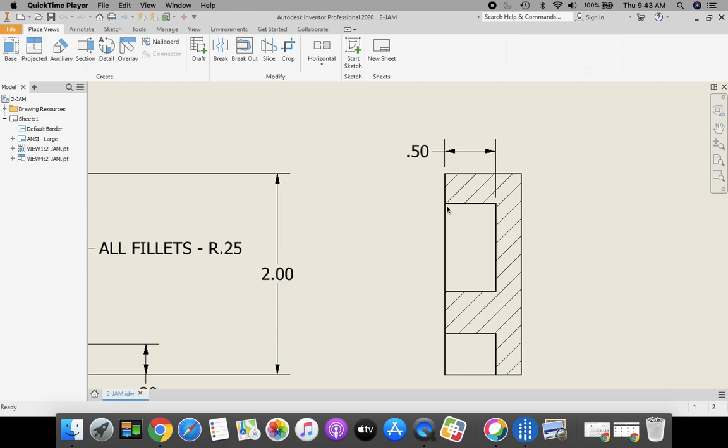It's never a good practice to dimension hidden lines. We could have done it up here on a hidden line, but it's not good practice. So that's why we're creating this section view, and here we're going to dimension to an object line to show the depth of these two pockets. Okay, so let's get started.

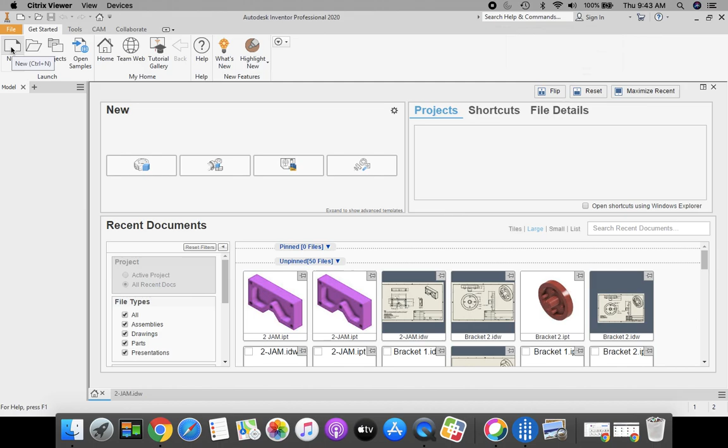Today we're going to start off on our home view, and we're going to come up to our ribbon bar in the top. We're going to select New, Standard IDW, this icon right here, and click Create.

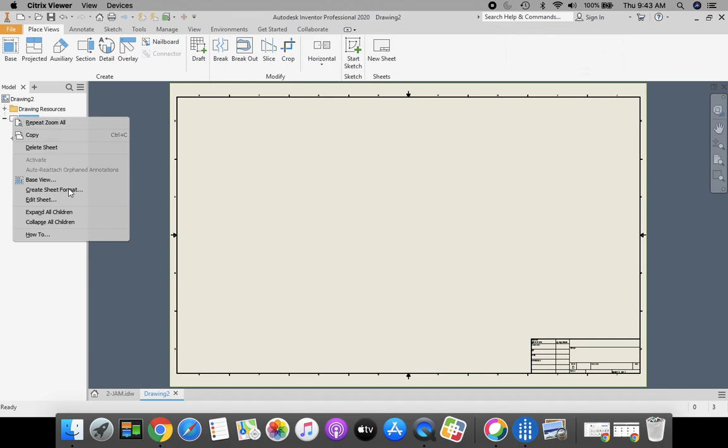Once again, we need to change our sheet size. It starts off with default as a D size sheet, so we're going to come to the model browser bar on the left hand side, and we're going to go to Sheet 1, right click, Edit Sheet. And here we're going to change our sheet size to size B and click OK. Okay, looking good so far.

Next, let's go get our 2 JAM part. We're going to come up to our ribbon bar. We're going to click our base view and select that. Then we need to go to our browse folder right here, the magnifying glass in the folder to open our file.

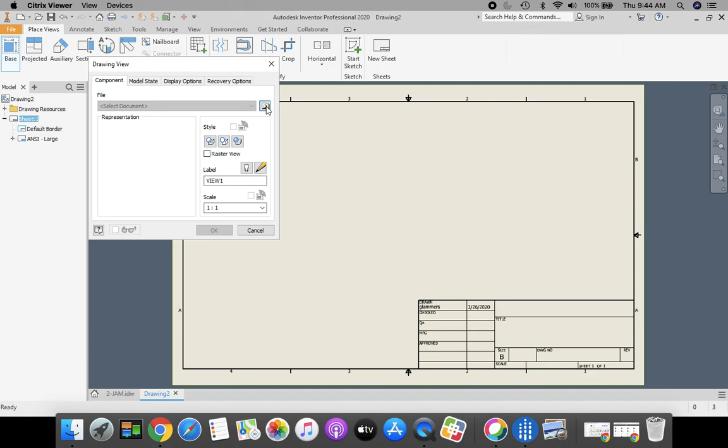We should automatically go to our H drive, this gray box, green line underneath of it, first initial last name 000. If that doesn't automatically come up for you, just click on the pull down menu, and all the way down to the bottom is where you're going to go. Okay, and in your H drive, you're going to find your 2 JAM part and click Open.

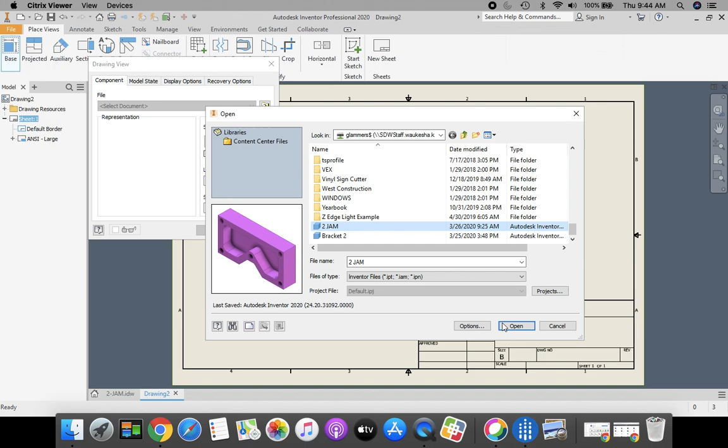Once we have that selected and identified, we're going to click OK. Take your cursor, get the red dotted line that goes around the perimeter of your object. We're going to click and stretch this over to the left.

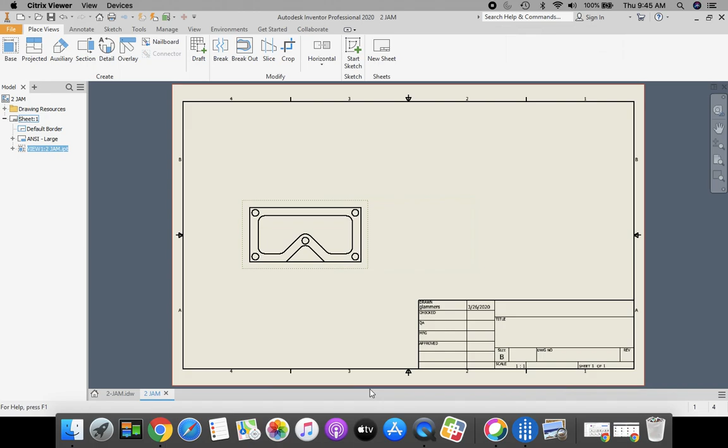Okay, now let's talk about creating that detail first. So up in the top here, we have a couple different views. We've used base and projected view before. Now we're going to come across and we're going to choose section view, and this shows the internal detail of a part. So we're going to click on section view.

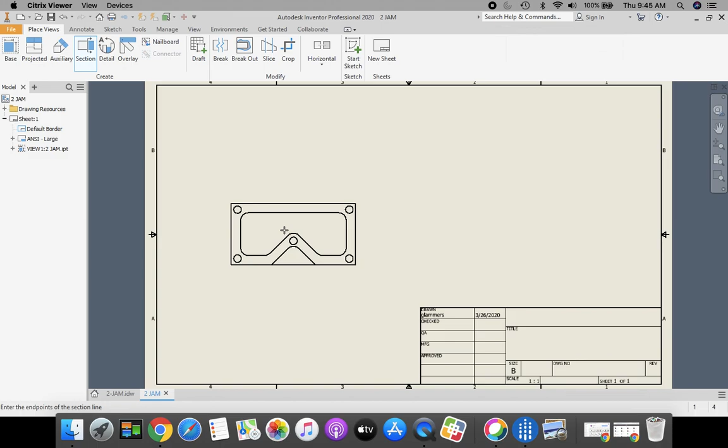And we're going to come over here, I'm going to zoom in on that a little bit for you. We're going to come in here, and I want to have my mouse kind of in a vertical line that I'm going to end up cutting through this direction right here. Okay, so I'm going to click, and I'm going to start making my line come down. This is where I'm cutting through, and that looks like a pretty good place to cut.

If I'm not happy with that, I can always press the Escape key, click Section again. Once I get that plus mark, I'm going to click, and I can draw that down. Try and stay on a vertical if you want. Okay, so here we go.

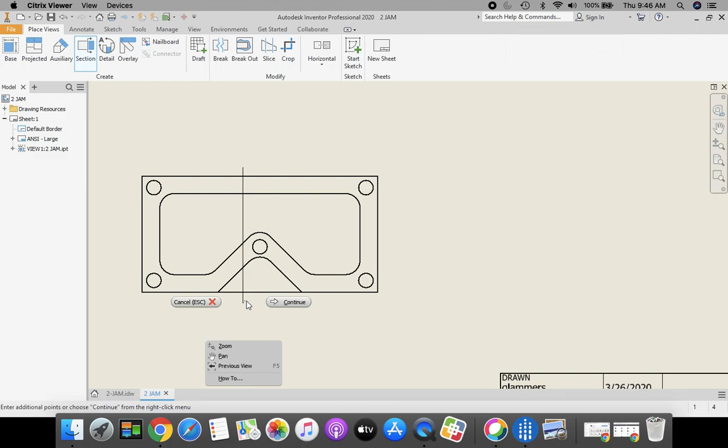Get your little icon changed to a plus by clicking, and then I'm going to stretch that coming down. Once you're happy with where you're at, we're going to click to place that line, and then I'm going to right click. Those of you on an iPad, you might have to go up to the top, use that little window shade pull down and select your mouse to get your right click, and then I'm going to select continue.

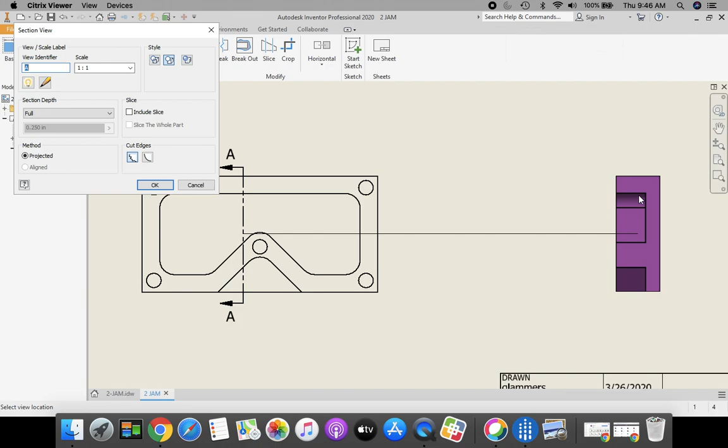Okay, automatically it takes and positions my section view line, so you can see my cutting plane line. Let me move that off to the side. You can see my cutting plane line here. I'm going to take my detail and I'm going to move it off here to the side. Click to place it. Nothing to it. That's how we make a section view.

Okay, let's go back out. Now let's take care of the other view. We need a top view up here, and we need a pictorial isometric. And in order to do that, we're going to click our projected.

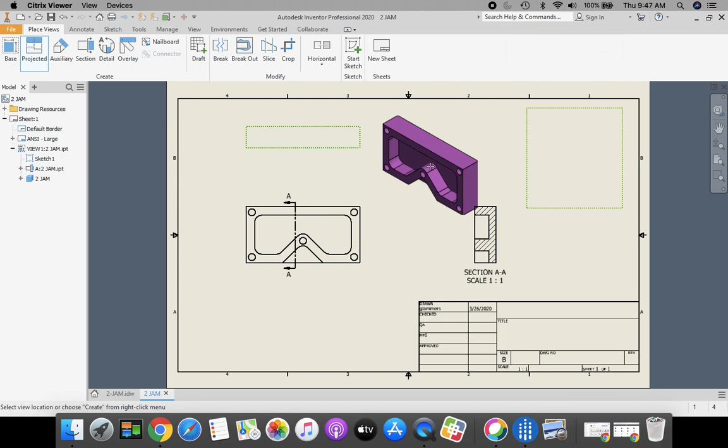Okay, now when I selected my projected view, it doesn't automatically have that icon or that image attached to it, so I need to come down to my front view, click my front view, and now I have that attached here. So I'm going to position my top view, click to place it, and I want my pictorial isometric view, click to place that as well. When I'm finished, I'm going to right click and select Create.

Okay, now according to the dimensions that are on here, these are dimensions you guys are going to be putting on. I'm going to place those on as well. These notes and the techniques learned, you don't have to add those on.

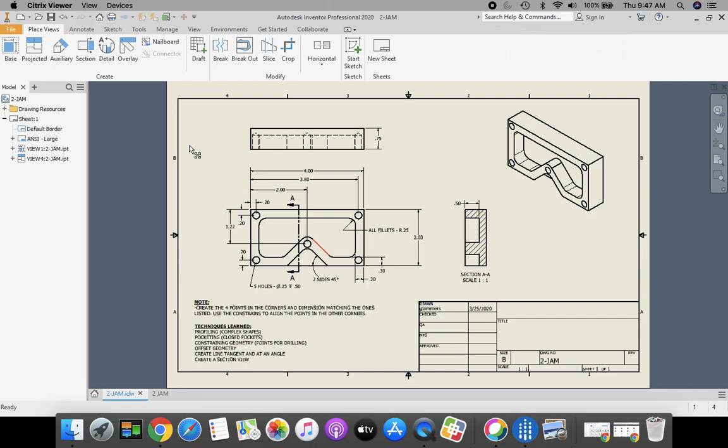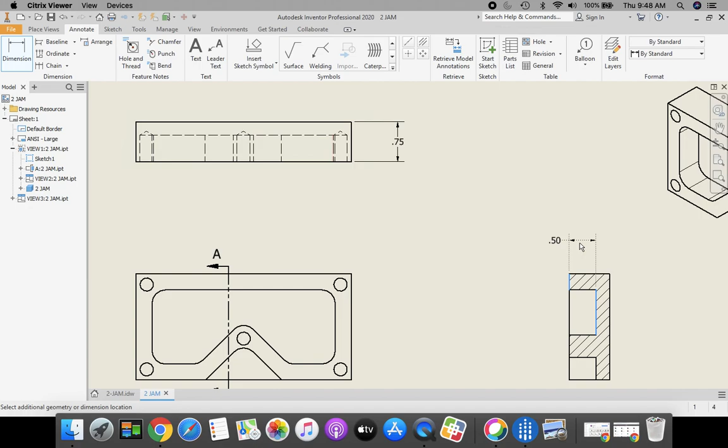Let's go back to our drawing. So now on our drawing, I'm going to go up to the top above my ribbon bar and select Annotate. Coming in on my top view, I need the Dimension tool, and I'm going to dimension the right side of this top view. That shows me my extrusion depth. And this is where our detailed version, our section view version, comes in, where I can actually dimension to get the depth of that pocket.

Okay, now I think all the other dimensions we have on our front view. So let's start placing some of those on. Dimension tool, I'm going to dimension from the hole to the side, hole to the top. And all I'm going to do is keep placing these on according to the same location that they are on our part. This shows us our offset.

What else do we have in there? Okay, nothing too bad. I need the vertical one for our hole. Okay, now let's take a look at our hole and thread tool. For dimensioning, since we have holes and threads, we're going to take and place this on here. Bring that down, that looks like a good spot. And let's see what else we're missing.

We could do this angle dimension in here. So let's go back to our dimension tool. Click on your angle line, click on your horizontal line. Okay, now you see how it puts the 45 degree on our block. That's just the order that we selected in. So let's do our bottom line first and then our angle line, and see how that takes our 45 degrees and puts it on the outside now. Okay, that's a much better spot.

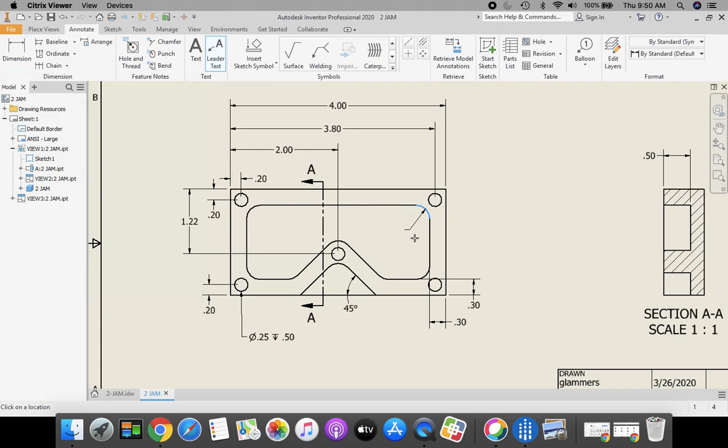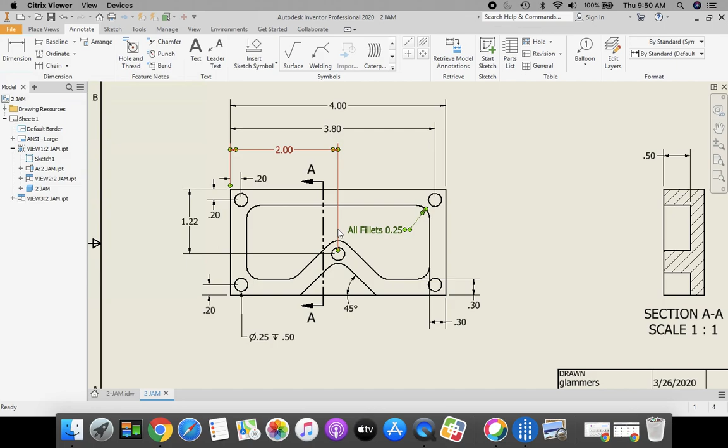To get our fillet definition in there, we're going to click on leader text, and we're just going to come in here and grab one of our areas. Press enter on the keyboard when you're done. And then we can type in all fillets 0.25. We can move that off to the side. Click on your text, and you can move that out to the side. See how I'm grabbing that little green dot that's right there?

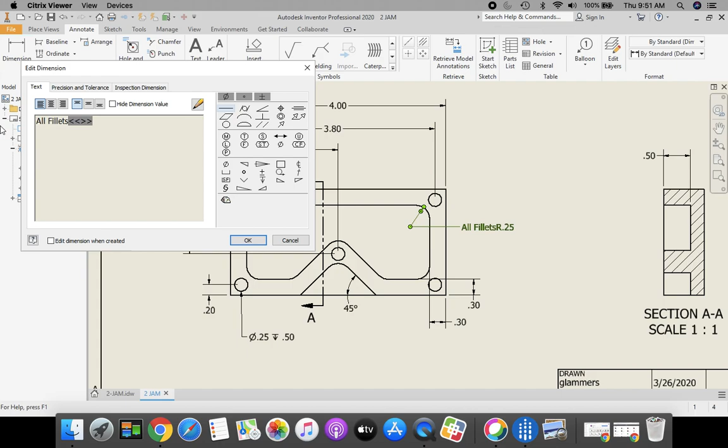Okay, another way that you could do this one, I'm going to delete that. Another way that you can do that: if you grab your dimension tool, you come onto that circle, not getting the green dot, and it automatically places it on there for you. Then you can take your text and move it off to the side. Click on your text, put your cursor in front of the stuff that's in default, and then you can type all fillets. Click OK. Both ways are acceptable and are fine.

Okay, now we have that part done. Let's get it prepared in order to turn in. First thing we're going to do though is save it. We're going to go up to the orange file in the top left hand corner, click on Save File, and go down to Save As. Once again, this is going into your H drive. First initial, last name, 000, gray box with the green line underneath of it. File name is the same as 2 JAM is great.

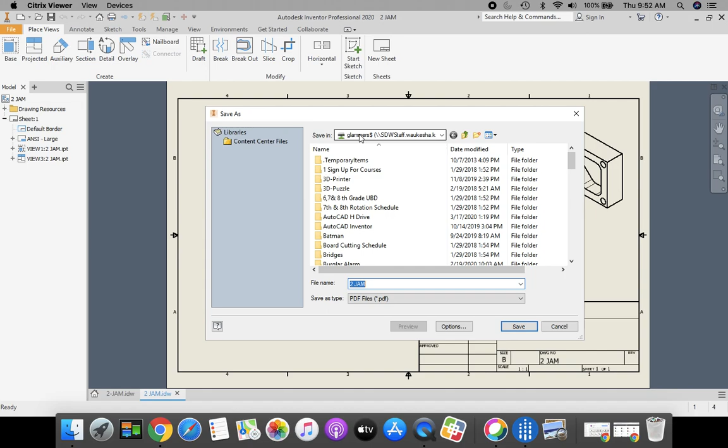Click Save. Okay, now we're going to make it a PDF. So we're going to go up to the top orange file in the top left hand corner. Go down to Export. We're going to export PDF. Make sure this is going into your H drive. And click Save. Great job.

Created that offset part. We used vertical and horizontal constraints in order to constrain these 4 holes in the corners. We did our offsetting lines. We did an angular line tangent to a circle at a specific degree. And on our drawing, we created our first section view.